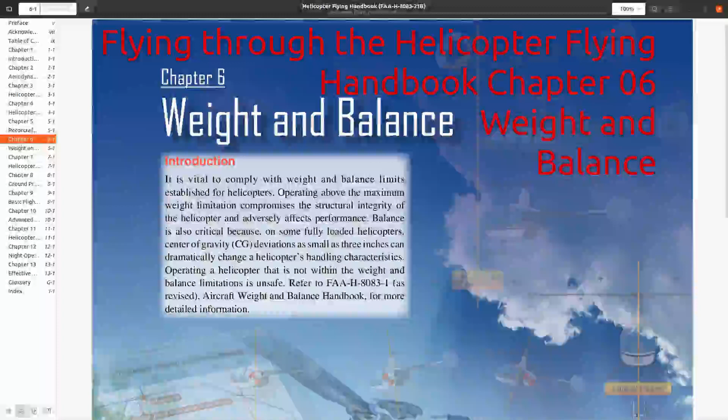This is the video for Chapter 6, which is all about weight and balance. So weight and balance is very important for any aircraft. It's especially important for helicopters. And why is that? Well, helicopters are more complicated, as always.

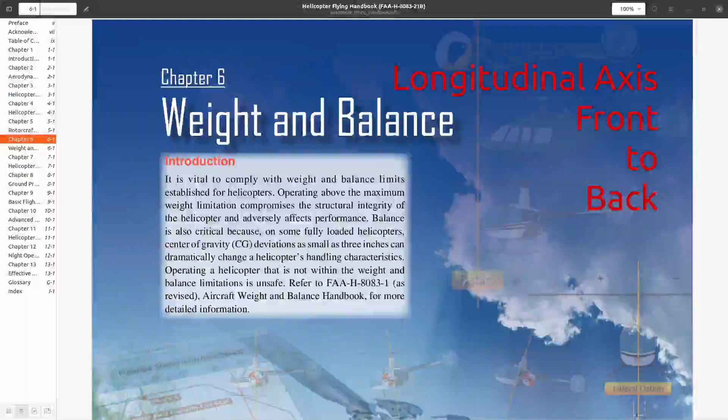In an airplane, for example, we only worry about the total weight and the balance in the longitudinal axis. But for a helicopter, we also have to worry about the lateral or side-to-side weight and balance as well. Just because of the way the helicopters fly, they're more sensitive to that. Now, of course, we haven't even introduced some concepts such as sling loading, where you have an external load on the helicopter, and that just makes things even more complicated.

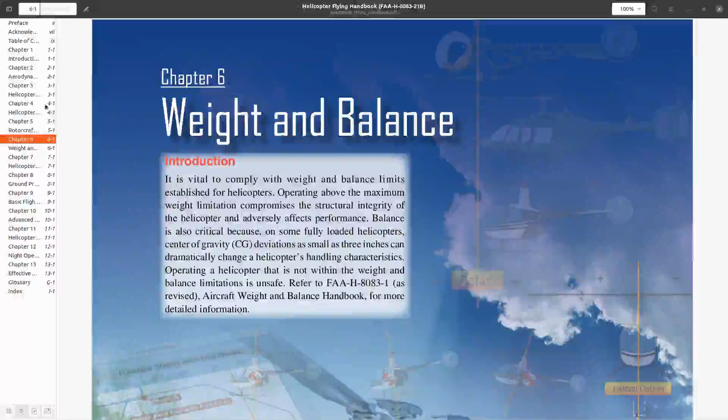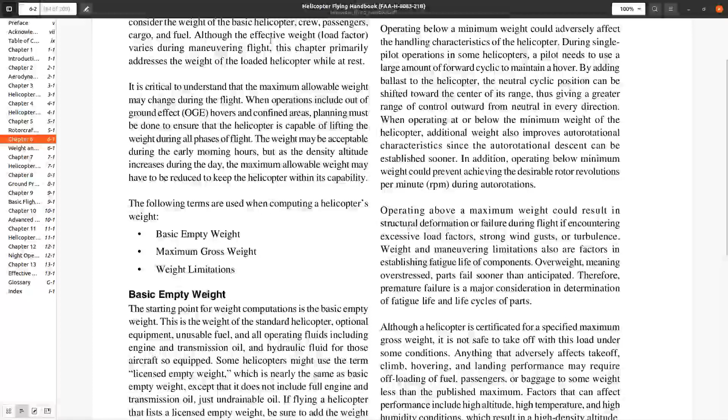So when you look at weight and balance, how do I calculate my weight and balance? Well, a couple of concepts first. We have this thing called empty weight, basic empty weight. What is it? Unusable fuel, fluids that you normally would have in the helicopter, things like that. So this is what the helicopter weighs when it doesn't have any useful stuff in it, if you will.

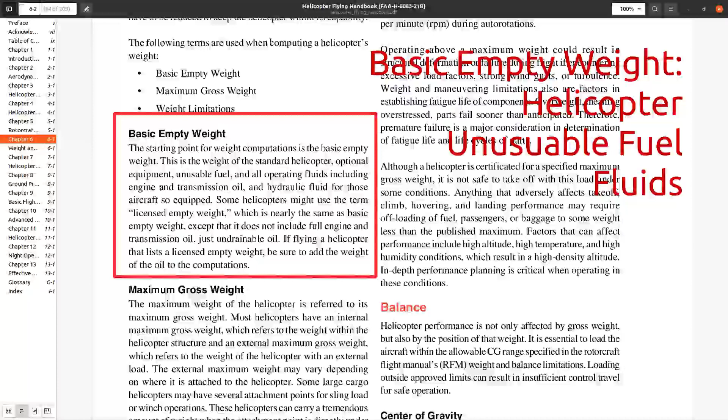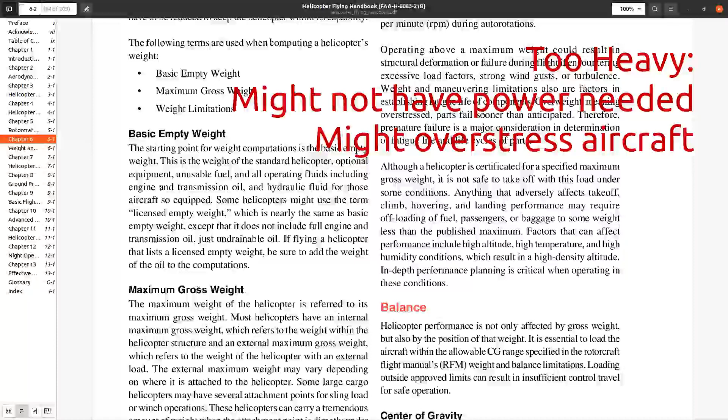And to that, we're going to add passengers, maybe some cargo, and fuel, of course. That will tell us if we are above the maximum gross weight, and we want to stay below that. Because if we're above weight, the helicopter's not going to perform very well. We can actually be too light. So there are some helicopters that have limits. This is the minimum weight that you can take off with in this helicopter.

Because, for example, if it's a Robinson, and they have those rotor systems resulting in the whole SFAR 73 because of their issues, well, if it's light, then you're more likely to get into those problems that have led to SFAR 73. You also need your aircraft to be balanced. If the aircraft is not balanced, then it will not perform appropriately.

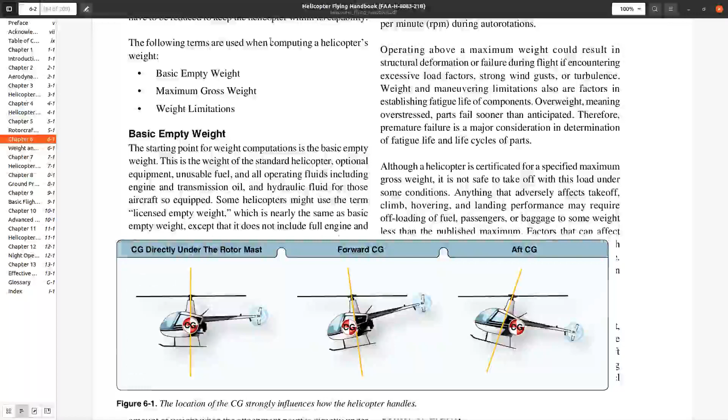So if your center of gravity is too far forward, you might not be able to flare in an autorotation, or you might not be able to essentially stop if you're trying to come into a hover because you don't have enough aft cyclic to overcome that extremely forward CG. Now, if it's extremely aft, then you'll also have issues with that, right? Now you're having a hard time going forward because the CG is too far aft. And of course, there's the side-to-side limits as well.

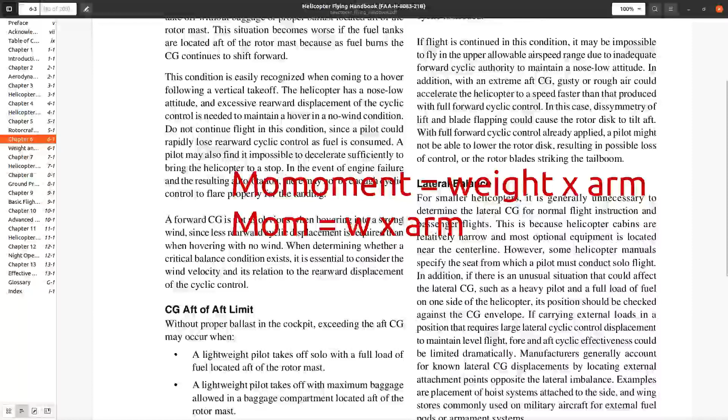So how do we calculate weight and balance? You just need to know that your mom is warm. So your moment is your weight times your arm. So you can do those calculations. Now, something I like to do is make a spreadsheet for any kind of aircraft that I might be flying. So I wanted to walk through this spreadsheet really quick.

So here's a weight and balance for a Schweizer S300 CBi that I fly quite a bit. You'll see that it has a certain empty weight, and that is 1184 pounds. And the helicopter has been weighed, and they found that its total moment, if you will, is this much in inch pounds, and the arm longitudinally is at 100.2. So you're going to say, well, what does that mean?

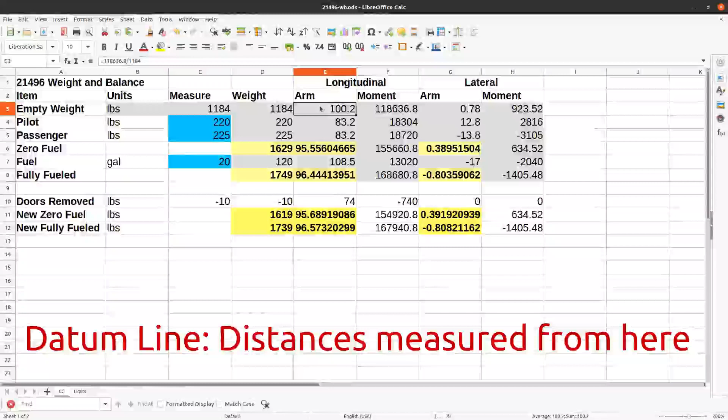So we have a datum line that we use to reference for both axes. And in the case of the Schweizer, it's 100 inches in front of the main rotor mast. So the CG is slightly aft by 0.2 inches of the main rotor mast for the basic empty helicopter. Laterally, that arm is 0.78 inches. The datum line for that dimension is at the middle of the helicopter. So that is 0.78 inches to the right.

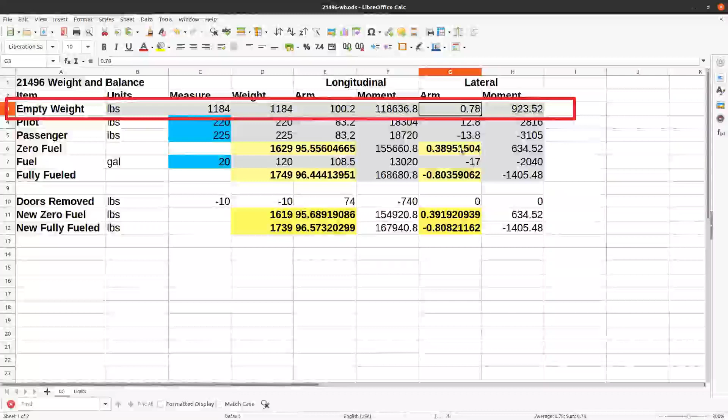Okay, so to that, we just add our different pilots. So we have a pilot. I just had an example pilot that was 220 pounds, and an arm of 83.2. You can get this out of your manual for the helicopter. If you look at the flight manual, we talked about this in the previous video, you look at chapter 8, it's all about weight and balance, and it'll tell you these arms for these various items. You just look it up and you plug it in.

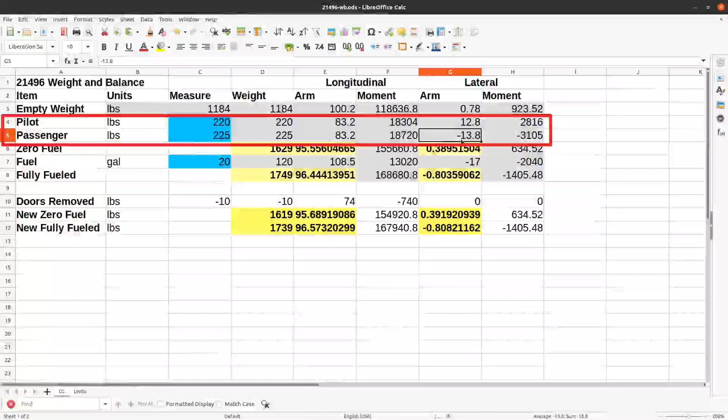So very simple calculation. You'll notice here I just said, hey, it's just the weight times the arm. That's the moment. And here's the lateral arm. If it's the pilot, they sit 12.8 inches from the center. And for the passenger in this Schweizer, they sit on the left, and that is minus 13.8 inches. And you can calculate the moment.

So what you can do is you then add up all the moments. So here we've added up all of these moments and we came up with this number. And then to get the arms, we add the moments in each direction and we divide by the weight. So here I have a total weight with no fuel of 1629, and that gives me a longitudinal arm of 95.55 and a lateral arm of 0.389.

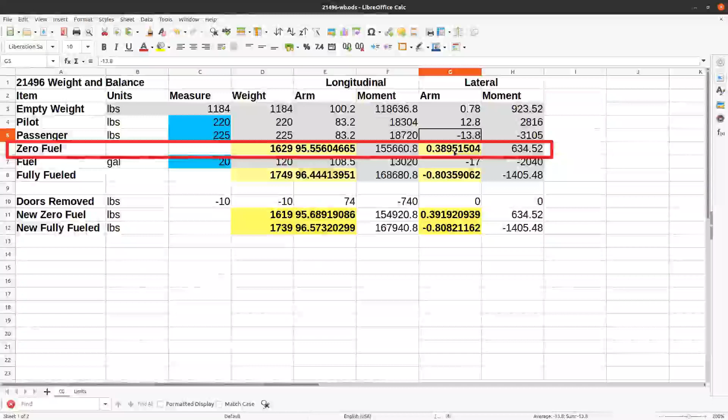Now what? Well, usually you want some fuel. So if I add in the fuel and I said I'm going to have 20 gallons of fuel, and fuel weighs 6 pounds per gallon. So that's a pretty simple calculation here. Here's the arm from the manual. Here's my moment. Here's the lateral arm.

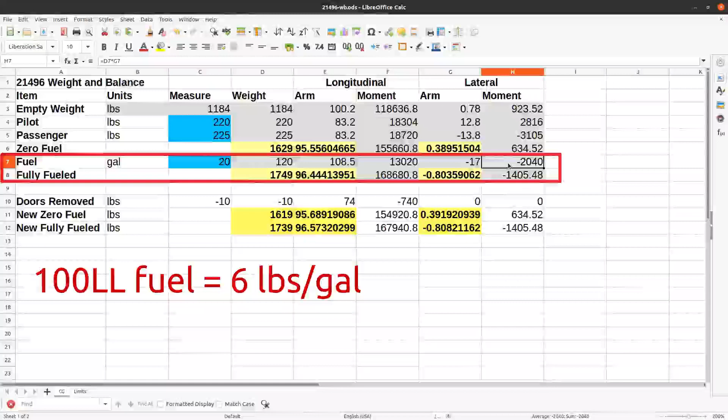Fuel tank is on the left in this helicopter, so it's minus 17 inches. And that's my lateral moment associated with that. And I can add that to my empty weight, and I end up with a total weight of 1749. This helicopter is good up to 1750, so I'm good. And here's my arm and my arm.

So in a little bit, I'll show you what this looks like if I look at a chart. So I'm going to have a little chart that I grabbed out of the manual and I essentially put it into Excel. Okay, and there are some options. We can take the doors off. The doors weigh 5 pounds each. So the weight is going to be minus 10.

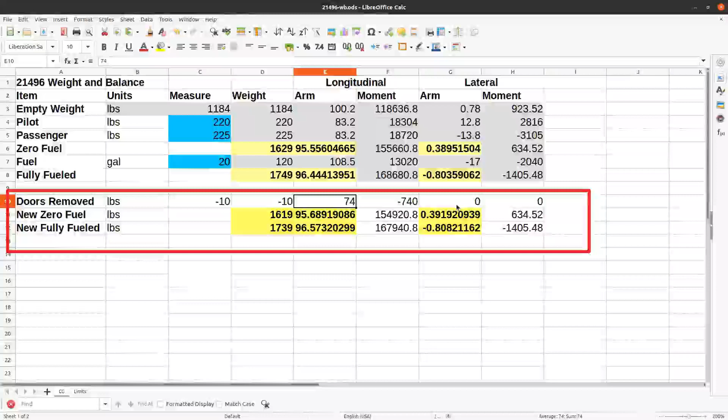And here's the arm. Now, I could have done a calculation for each door separate, but that's just a little weird. Normally, if we take one door off, we take off the other one, although you can fly it with just one door.

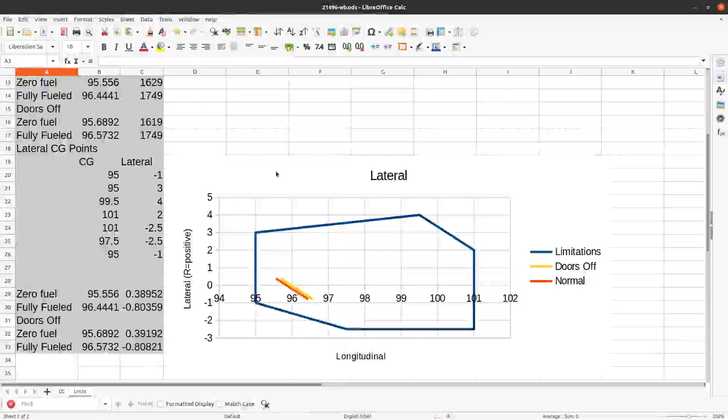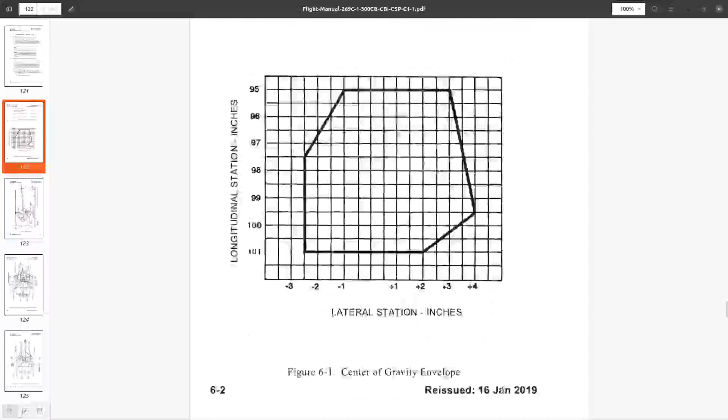Incidentally, if I bring up this manual, you'll notice that I've sort of inverted this. They have longitudinal here and lateral here. But those are the only limits for the CG in the Schweizer. So real quickly, I want to show you a much more limited machine, a R22.

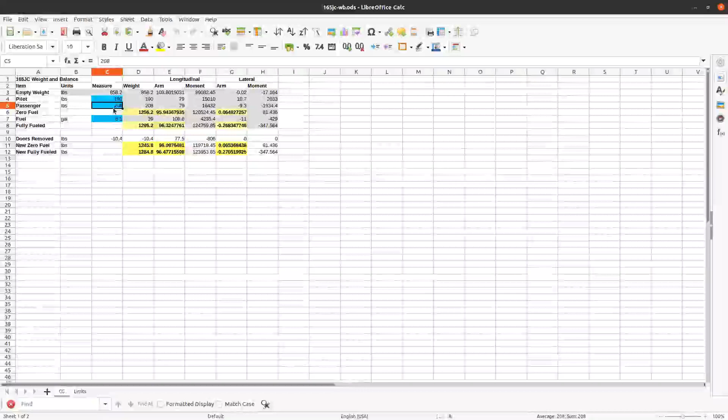Okay, so for the R22, it again has a basic empty weight. You'll notice it's 300 pounds lighter than the Schweizer. And the moment and arm, and this is stuff you're going to get out of the helicopter, right? Every helicopter is going to have a weight and balance sheet in it. And then we have a pilot. We have a couple of lighter pilots here. We have a 190-pound pilot and a 208-pound pilot, and we're going to use 6.5 gallons of fuel.

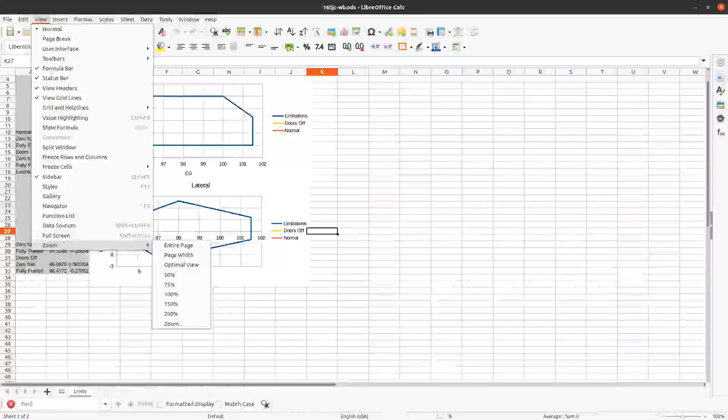And I just wanted to show you this briefly because what I've done here that's a little bit different is the Robinson has a limitation with the weight versus the longitudinal CG. And this is fairly common that you'll find. It's just that the Schweizer doesn't have this kind of a limitation where the maximum weight is 1,300 pounds.

And you'll notice here with these two guys and the doors on, we're actually outside of the weight. And if we take the doors off, we're just touching it. And then as we fly, we get a little bit lighter and we go further in. Now, in terms of the CG, we're okay. So here's that same CG diagram.

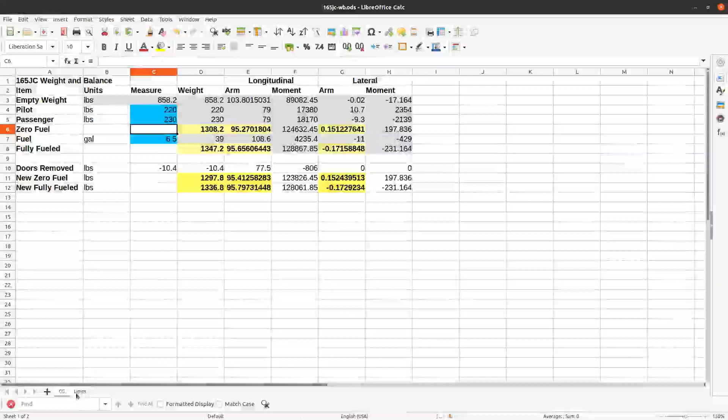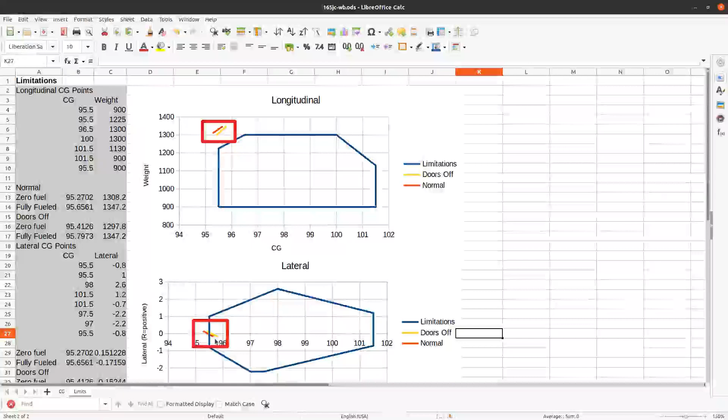So for example, if I were to use the same weights as what I used, I think I said the pilot was 220 and 230. Even with only 6.5 gallons of fuel, I'm already 50 pounds over, so I'm not going to perform very well. And if I look at my limits, notice I'm way out here now, and that's not good. This helicopter is not going to perform, and I've also exceeded my CG limits. So this helicopter is really not going to perform. Not a good situation. You've become a test pilot, essentially.

All right, so let's see how this affects us in the sim. So I'm going to go ahead and load up my trusty Schweizer. I'm going to click on the customize here in X-Plane. You'll notice there's a weight and balance section. So I can use the default weight and balance. Interestingly enough, you'll notice by default, they overloaded this thing.

Also, there is an option for 2 tanks on the Schweizer. So this one obviously has the 2 tanks. It's got a left tank and a right tank. I'm going to go ahead and say, hey, we don't have the right tank, and we're going to have 120 pounds or so in the left. And I have about 2 hours of flight time, which sounds correct to me.

You'll notice they also have the ability for a slung load, and you can select the object that you want to sling and how much it weighs. So that's something that's fun to practice with if you want. Okay, so let me just go ahead and say, yep, that's good. And I'll start up. All right, so I'm just going to do some quick hovers.